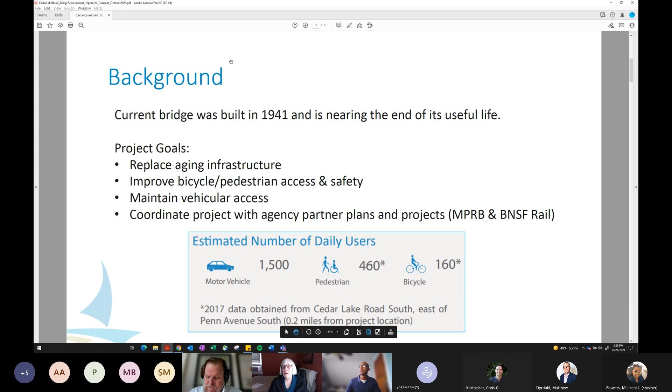Here's the project map. The red mark represents the bridge. We have the Luce Line Trail here that provides a connection and travels over the bridge, connecting into Bryn Mawr Park and also into the Cedar Lake Regional Trail. This bridge, and another bridge here that's not being reconstructed with this project, form a really critical multimodal connection into this area of the city.

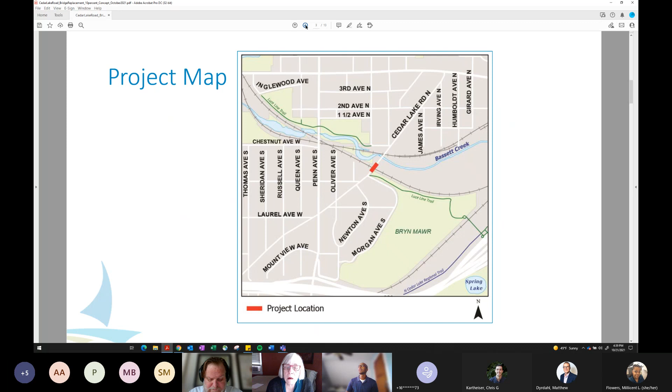Here's a high-level view of the proposed improvements. I wouldn't get too hung up on this; we're still not done designing the intersection, but this really just highlights that we're putting in bike facilities, a sidewalk, and roadway facilities as well.

This shows the northern terminus of the project, and the southern terminus will be after the intersection. So we will be reconstructing the intersection as well, and then tying into the Luce Line Trail to Bryn Mawr Park.

This is the existing bridge cross section. A 6-foot bike lane, two 12-foot travel lanes, and then a bike lane and sidewalk. You can see here we have a total width of 50 feet, and our proposed treatment actually widens that bridge, from 50 feet to 56 feet.

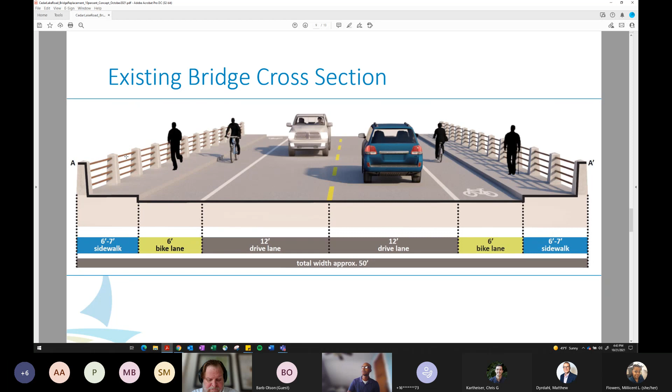So the bridge is going from 50 feet to 56 feet, so we're widening it by 6 feet. We're enhancing bike ped facilities, separating them from motorists.

Project schedule: we have our open house next Tuesday. We'll be sharing basically this concept at the open house, and then we have an update that's actually going to be late winter, early spring. We're going to go back with our second virtual open house. We'll have a finalized concept, and also be providing opportunity for input on the treatment of the bridge railing and sharing options. And then this will be reconstructed in 2023.

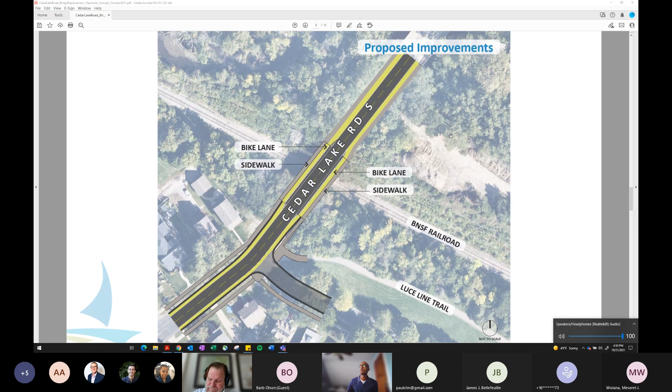So, Julie, just to make sure I understand your question, I'll go to the cross section. I guess your question is, is this treatment capable of accommodating a potentially higher volume of bike and peds?

Yeah, basically. And I guess I also am wondering if you're starting to use adjusted numbers in the way that, in the past, we've seen roads designed with a certain predicted vehicle use, like 2% growth per year or whatever. Are we starting to see that with the TAP integrated into things and adjusting for that? What would that look like to design this bridge with that really at the forefront?

So the way we've approached this design is providing access for bikes, peds, and vehicles, knowing that the vehicle volume is low and that we need to meet a minimum roadway width of 24 feet. We treated the roadway design to have 10-foot travel lanes to minimize design speeds, giving 13 feet on each side to bikes and peds. I think that can accommodate a pretty high volume—significantly more than is even actually occurring on that bridge.

And you don't have numbers yet for that, or you're not getting instruction on how to think about that or start shifting designs for mode share shift?

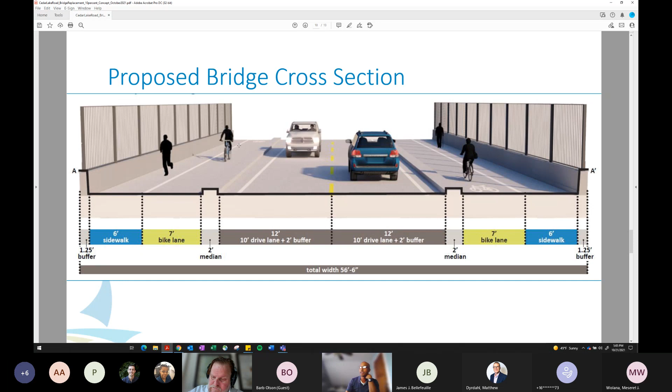The only thing I'll add is the open house is next Tuesday. The project website will have a link to it, probably added tomorrow. We'll be back later, probably near the end of winter, with the updated concept. And we thank you for your feedback.

One last question. Alex, you mentioned that you've been in cities that have done shifts in road networks fairly successfully, and I'm just curious what those are, because I would love to look into it.

Yeah, I lived in The Hague in the Netherlands, and they have the largest car-free zone in the country. They spent about 25 years reconfiguring their downtown to restrict vehicle access. So, you know, they've done a really good job of that. But like I said, they had a plan.

The city of Minneapolis has plans and policies around reducing mode share and things like that. But having a plan around how do you reduce your roadway networks, I think is a critical step. And The Hague did that very well—they have the largest car-free urban center in the Netherlands.

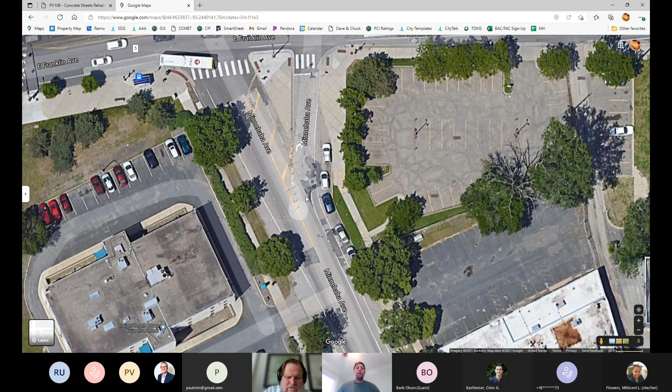Where we could do some greening, some stormwater management. There is quite a bit of opportunity for that, removal of some impervious pavements, and just an overall more enjoyable and safer pedestrian and bicycle realm for this area. You can see from the street view that we have quite a bit of concrete that's busted up pretty well. There's a lot of areas that are patched up with asphalt. So when we see areas like this from our surveys, these are really good opportunities that we find we could do something more extensive in these locations. So this is one of them.

The other location we're looking at for more extensive improvements right now is down here at 21st Avenue and Minnehaha. Again, you can see from the satellite there's a lot of asphalt holding together the roadway here. We have this odd geometry where Minnehaha is on a bit of an angle, and we have another street intersecting. So it makes for currently a really wide opening. So we look for an opportunity.

To really redesign the geometry of this location and implement some more greening and stormwater management, upgrade all our locations with ADA ramps, make sure we're compliant. We have good, safe crossings, and just a more enjoyable pedestrian and bicycle realm.

So those are our two locations that we're looking at as larger improvements, but throughout these corridors, this one's pretty short. You can kind of see where the concrete starts here and just goes up to Minnehaha.

So this is a shorter segment, but we'd be looking at all of the panels. We're working with a consultant to provide that work to let us know what panels will need to be replaced or repaired. And as we look at those, that'll let us know if we have opportunities throughout the corridor for just panel replacement, or whether it's something else where it's replaced with greening if it makes sense in that location, traffic calming or greening, those sorts of items, just as an opportunity.

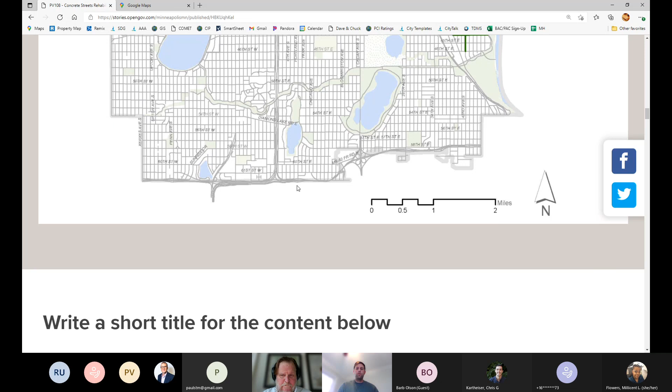Oh sure, I think you're referring to this page here. This is the OpenGov webpage. So I think this is what you're referring to, and all the subparts that talk about environmental justice and that kind of thing. Is that, I'm just blanking, is that a usual or required component, these different analyses?

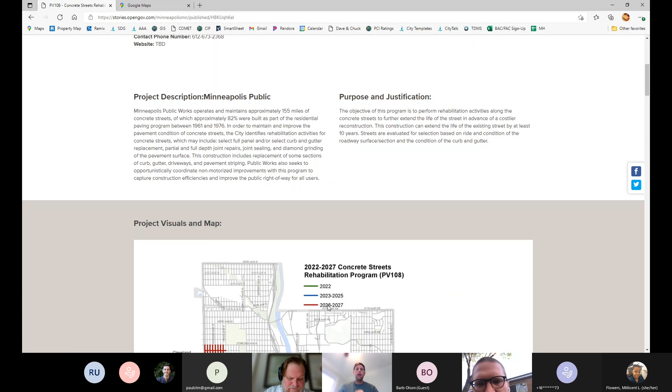So this isn't our formal project page that we list on the city's website. This is from our OpenGov website, and I'm not sure if Matthew or someone else on the call has more information on OpenGov, how that exactly works. I don't have a ton of background on this website per se.

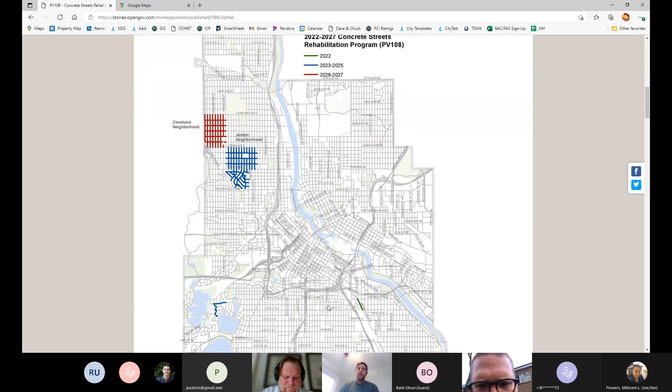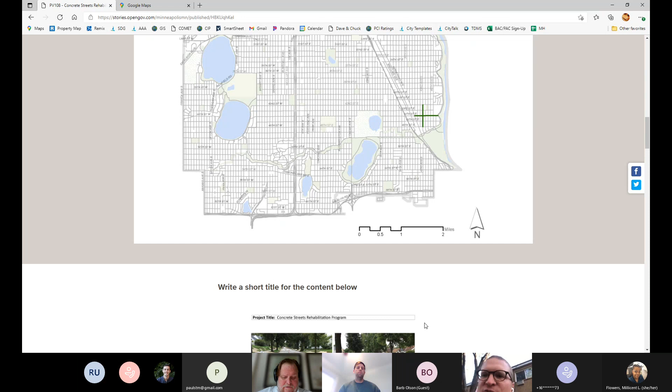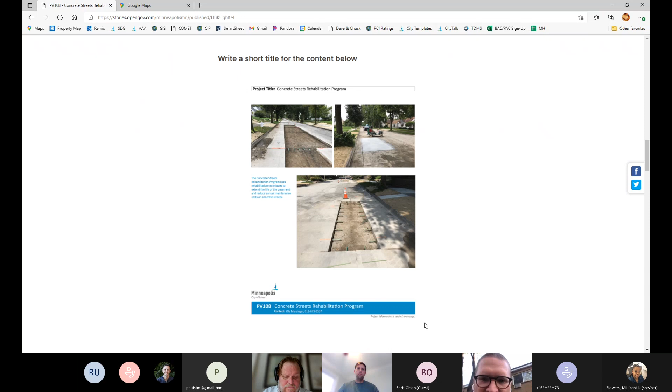Yeah, I'll share. Go ahead. So I think what we're looking at, does that come from CLIC, Christian? Yeah, I think this is the application to CLIC. Yeah, so we can talk about that now and later as much as we want. But basically, I think what Christian is sharing is what we call a capital budget request, which outlines a standard set of information for each project, and that CBR is how projects get into the capital improvement program, and that's what goes to CLIC, which is the capital long range improvement committee, which eventually ends up in the budget. So when we go through the cycle every year of how the CIP comes to life and comes to be, what Christian is showing you is that type of information.

Thank you. So, does that help? It's okay, nice to have the comments on operating impacts and transportation. It gives a little background that sometimes I'm not perhaps aware of. So thank you.

Are there any other questions or comments for Christian regarding this? I wasn't able to see what was being shown. I only had the link to what Christian was referencing, but it sounds like some of the intersections are by MnDOT roads, at least that's my assumption. I don't know jurisdiction, and I know that they generally do not put in all legs of the crosswalks. So I would urge you to check that and make sure that all of them exist at all intersections. They often leave off at least one at every under or overpass. So if you can work to make sure that every pedestrian crossing is included, that would be great.

Yeah, duly noted. And what I was showing was just a Google map. The streets that we would be doing the concrete rehab on are city streets.

Minnehaha, kind of up at Franklin, intersecting with the county roadway. There might be some partnership there, but I don't think we'd be looking to get into Franklin itself. It would just be the work on the southern leg of the intersection, so solely on Minnehaha. But I appreciate the comments though.